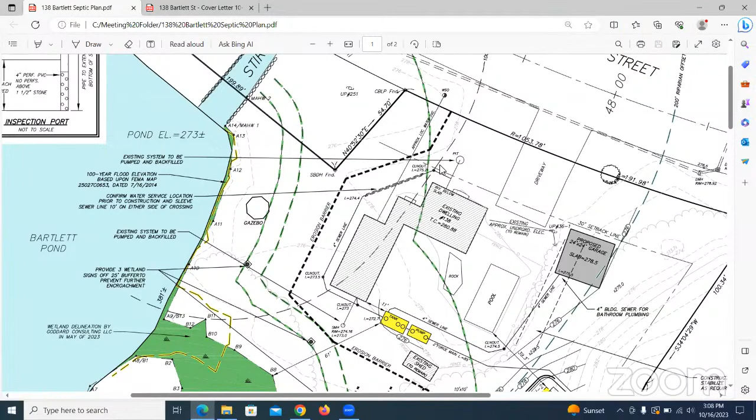I'll switch over to the plan now. So essentially what we have is this Bartlett Pond. This is that existing house right here you're looking at. And out in front of the house, they have a cesspool. And then out to the back of the house, they also have a second cesspool. This cesspool in the back is well into groundwater. We had groundwater at about 12 inches, 18 inches in the backyard. And that cesspool is down right into the groundwater, which is why it failed. The front one, I think, might have passed, but if you have a failure in one, it all fails.

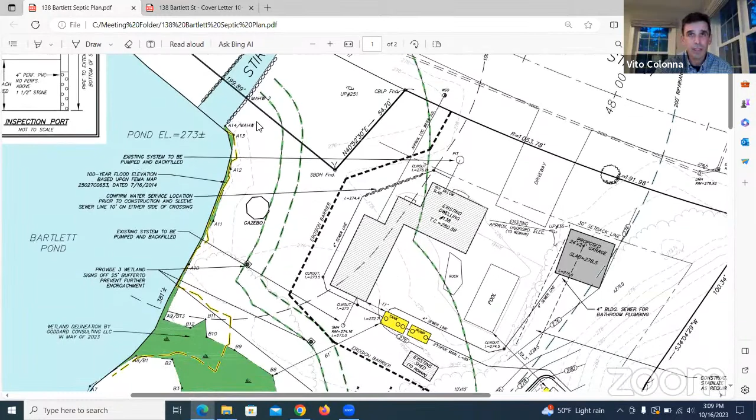So we have Bartlett Pond here with a little fringe of wetlands that pokes up into the backyard. And then we also have the beginning of Stirrup Brook as the outlet. It's that sluiceway that kind of goes down off of the pond and goes through a stone culvert under Bartlett Street. So we have riverfront area that extends out covering most of the site, and then also a 100-foot buffer.

So the 100-foot buffer kind of cuts through the middle, and then the 200-foot riverfront arches out over most of the site. So what we're able to do is locate the septic system outside both the 100-foot buffer and 200-foot riverfront area with the leach field. That's over in this kind of corner over in here.

We had good soils over there, but very high groundwater. We were hoping it would dry out this year, but it didn't. So they're probably going to have to de-water that during construction, just to get down far enough to remove all the unsuitables and bring in good soils. So that's one of the issues with this.

While it's outside the buffer zones, construction-wise it does get into some impact inside that 100-foot buffer, just because of the dewatering required. So what we proposed during construction was essentially to pump it out and through a hay bale corral. So it's just a ring of hay bales to allow settling, and then a series of straw bale check dams through this area, just to give it a chance to filter out and discharge onto a stabilized surface.

And they just need to do that while they're doing the excavation for the leach field, which would only be a couple days. So it would be a fairly quick process, but it is something that they do need to do to get that in.

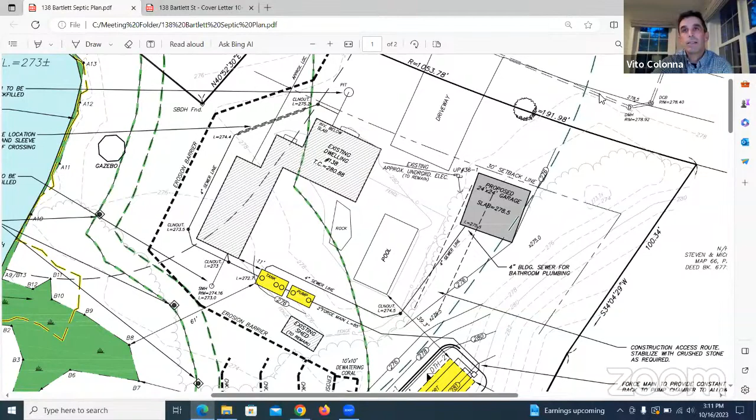And the second component is they were also proposing a detached garage right up in this location. It's a 24 by 24 foot garage, and it is in the riverfront area. This bluish line here is the riverfront. So it's fairly far removed from the resource area, but it still is within that 200-foot zone. It's about 174 feet right now, but it is separated from the resource by the driveway and the lawn and the house areas.

We did look at alternatives. It's one of the things Vinny asked us to do, to look at alternative locations if we could push that further, because there is this space over in here that would be outside the 200-foot, but it comes with its drawbacks. Let me just bring that up. So this is an alternative plan that we developed, just showing that you could push that back.

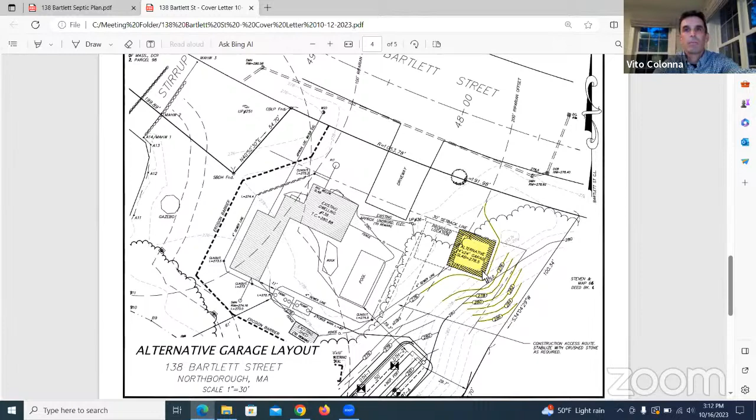The only drawback is that it would get into this steep slope a little bit and would force us to do grading right up to the property line and then clear all these trees up in here. And while that tree clearing isn't in the buffer or the riverfront, it is still native and natural vegetation that we would have to clear just to get this garage a little bit further away.

And there's also a natural flow path that anything that doesn't get caught in this catch basin flows down. There's a low point here and it naturally flows through the site. Putting it here would block off that natural flow path and would force it around and through the back, not creating a very good drainage situation there.

And the third thing is this area here will already be cleared because that's the access path to get to the septic location. So we figured if we're already clearing it, and it would minimize other disturbances and other earth grading, it would make sense to put it right here. And it's in close proximity to the driveway, just for functionality with the site use.

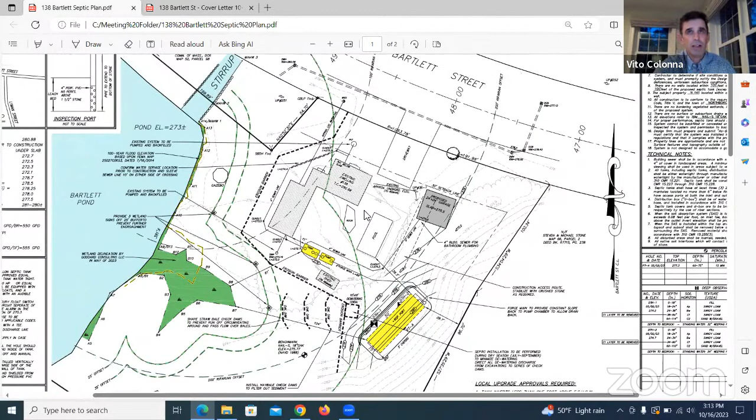So those were really the two items that we looked at under this NOI. So I'll just hand it back and take comments, questions. Thanks, Vito. A couple questions I have here. So for the backyard piece of it, the pump station and the tank, they're like 60 feet away from the wetland line. Mhm. Okay.

What about that cesspool that's in back? What's the plan for that? To crush it and get rid of it, or? Yeah, they just crush it and backfill it. So they'll pump it out first. Yep. So they usually just pump it, then crush it all in and backfill it down.

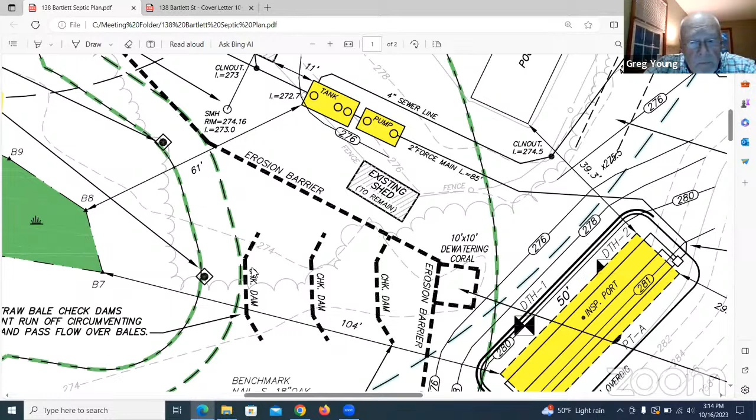Okay. So for the backyard, the only issue we have then in terms of the jurisdiction is the temporary check dams going through there. Yep. And those would just be straw bales, made in a U shape, just to slow everything down. And the front side, the new garage, it's 174 feet away from the riverfront. So a lot of riparian zone. Okay, I'm good.

Any other questions, comments, Commission? No? Vinny, how are you with this? I think it's a good design. It's a tough situation. Just so the commission knows, there's a cesspool that's in the front. They're going to be running a pipe all the way around the house. So if people drive by and see work on that side of the house, they're probably out there putting that new line in around the side to connect into the septic tank in the back.

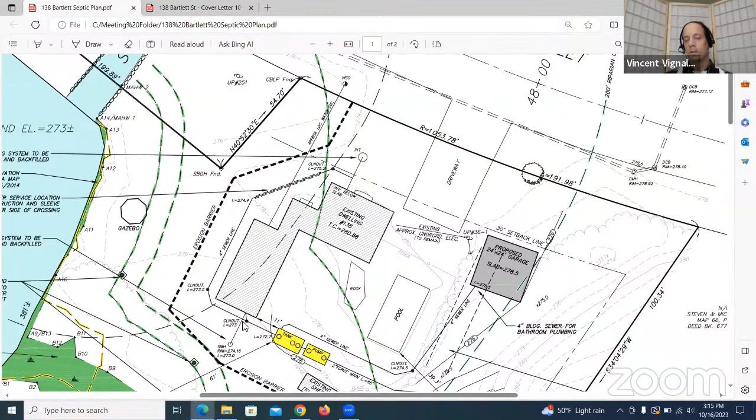And the same situation is occurring. It says garage, but I assume there's going to be some kind of a use in there that requires a sink and water because you got a 4-inch sewer line coming from the garage. Is that the case? Yeah, I forgot to mention that. They would have plumbing in this garage and they would need the sewer line that would come down and connect into the tank.

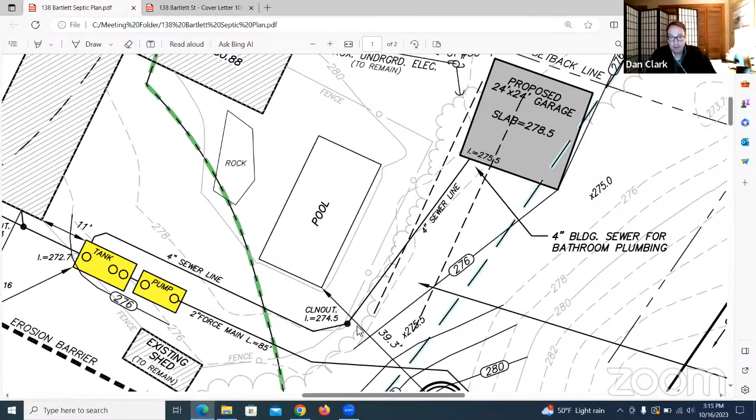So hang on a sec. I guess I do have a question. So the front one is staying online? They'd abandon that one too. So essentially what they'd end up doing is cutting into this pipe. There's an existing line coming from the house out to the pit. So they'd cut that line and route it around to the back. And the same thing, they'd pump that one, collapse it in and compact it with fill, and get rid of that one in the front too.

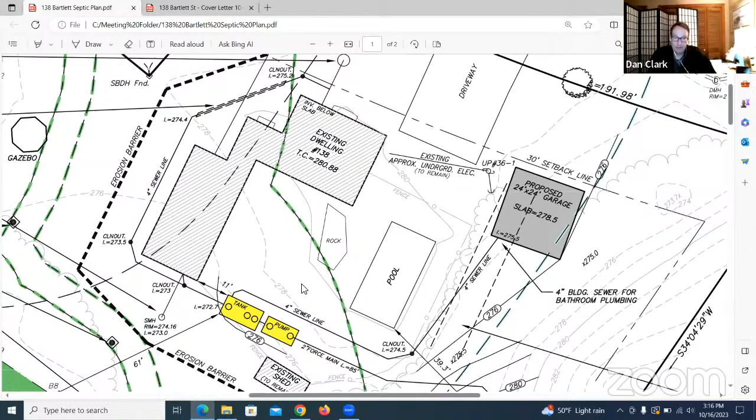Oh, I see. The sewer line from the house goes out the front and around the back. Yeah, there's two. So the proposed will link them all together into one. Right, now I see. They have two cesspools, one on the front, one on the back. So we're trying to link them all into one common system. Got it. You good, Dan?

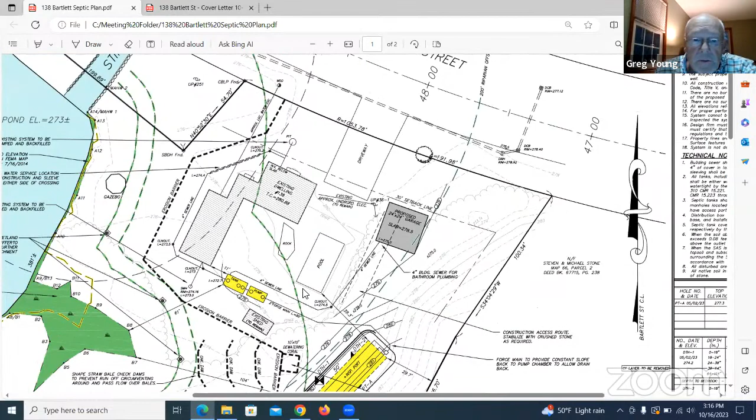Yep. Okay. Let me see if we have any public questions or comments here. I got a hand up, Ann Beckstrom. Ann, I'm going to bring you into the meeting as a panelist. Any minute now, we should be having activity. Looks like she's on mute. Yes, Ann, you're muted. There you go. Okay, sorry about that. No, it's fine. I did the opposite of what I thought I was doing. Excuse me, Ann, before you start, could you identify yourself?

Oh, sorry. Ann Beckstrom, and I live at 152 Bartlett Street, which abuts 138. So I just had a question regarding that other yellow section that is shown on the map, not those, but the other one there. Yeah, right there. Vito, you want to answer that one? That's the leaching area, the leach field for the septic system. Is that existing? Nope, that would be proposed. So they're going to replace the cesspools here with a new leach field out here.

And does that go into that berm area? Are you having to dig into the berm area? Yeah, so it kind of just abuts up to that berm. So it would be more of a filled system. So the berm would come down and then bump out over the leach field. So it's up against the side of that berm, but it's not something we have to dig into. We're not cutting away. We're actually going to fill right there.

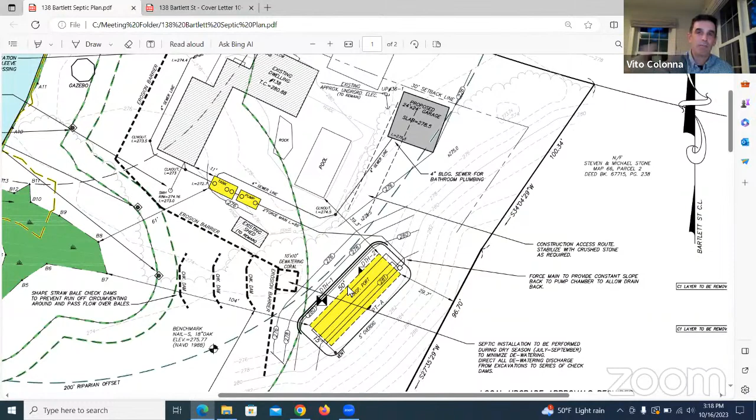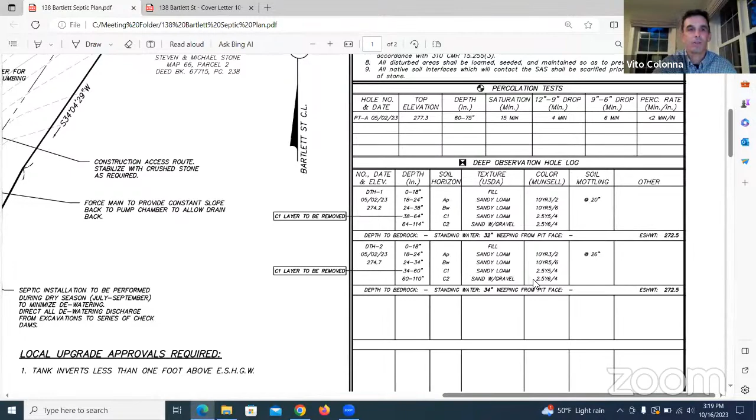Okay. And the groundwater there is? It's pretty high. I have the test pits on here somewhere. Yeah, 20 inches, 26 inches, the groundwater in those two in the leach field. Okay. So it's fairly shallow right there.

So are there any negative impacts of putting a leach field in an area that has such? Not necessarily, just because we would have to fill it up. So the leach field has to be at least 4 feet or 5 feet above groundwater. In this case, we have really good soil, so it has to be actually 5 feet above water. So we're going to bring in fill to bring that system up. I see. Okay. All right. Thank you. That answer your question?

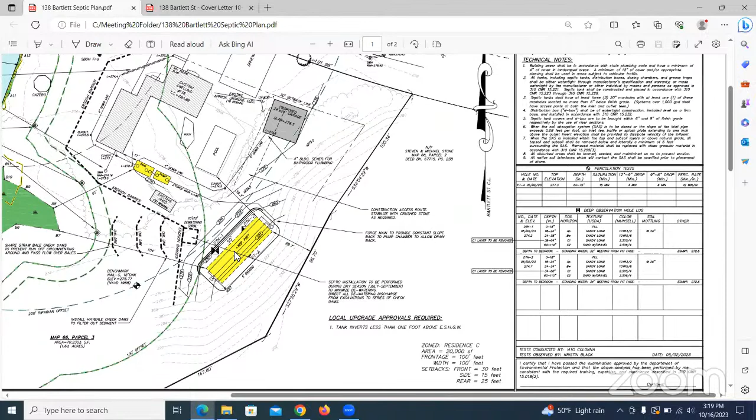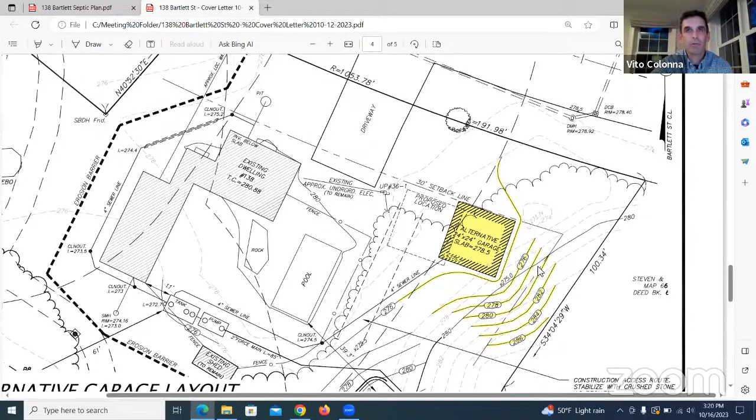Yeah, I think so. And when we are talking about the garage, we're talking about the positioning of it closer to the driveway rather than further away from the driveway, which would be then closer to our property. Just wondering how close that actually is. How close it is to the property line? Yeah. This option is not the preferred option. So this is about 25 to 30 feet. I don't have an exact dimension on that. And then this one would put it about 50 feet away.

So if we look at the street view, proposed wants to be right here. And then that other option would put it back into this hill, in the back. And you'd have to take all those trees down, which wouldn't be the greatest. So, okay. Hopefully everyone's okay with your preferred plan. Okay. Thank you.

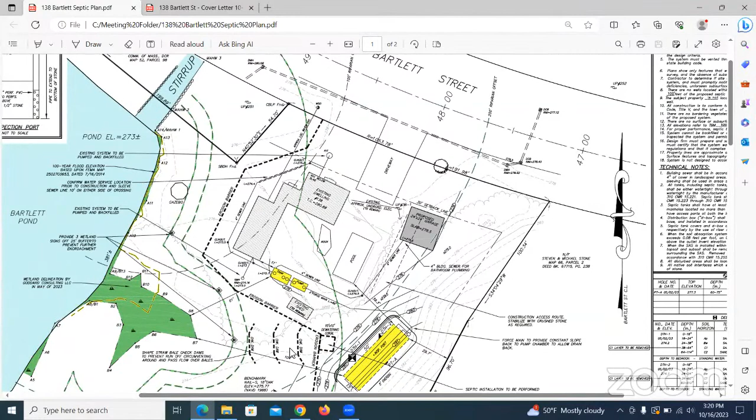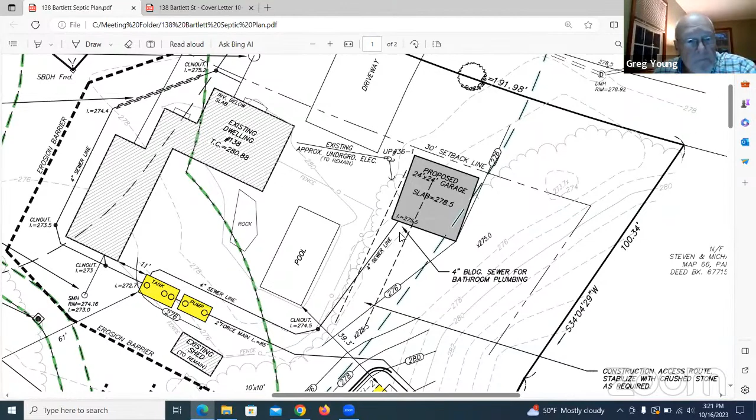Okay, Vito, what's going to be the deciding factor between proposed and alternative for the garage? Well, we like this one. This was the proposed plan. We just did the alternative. Vinny asked for alternative analysis, which you have to do anytime you do work in the riverfront area. It will justify the location that is the best, and it sounds like the commission agrees that what they're proposing is the best.

It's not really deep into the 200-foot zone, and there's a lot more alteration on the alternative, even though it's outside of the buffer zone. It's altered riverfront area right now. So okay, great. I think what they're proposing is the best opportunity here. Okay. I don't see any more hands up. Peter, just a quick question.

I thought about that garage at the back end of the driveway, closer to the house. Does it have garage doors on it? I'm just wondering if at some point somebody's going to come for an extension off the driveway to get into the garage if we don't place it there now. Yeah, we asked him that because it made sense just to come straight in. And he didn't want it there. I think this is going to be more like a storage barn.

He was unsure if he was actually going to build it, but he wanted to ask for it while he went through the process anyway. So the septic's really the key item he needs. He looked at it here and thought it might be too close to the pool and maybe not work with the house, and it would be nice to have it off to the side a little bit. I think it's more of a storage barn, shed, garage. I don't think it's to pull the cars in every day.

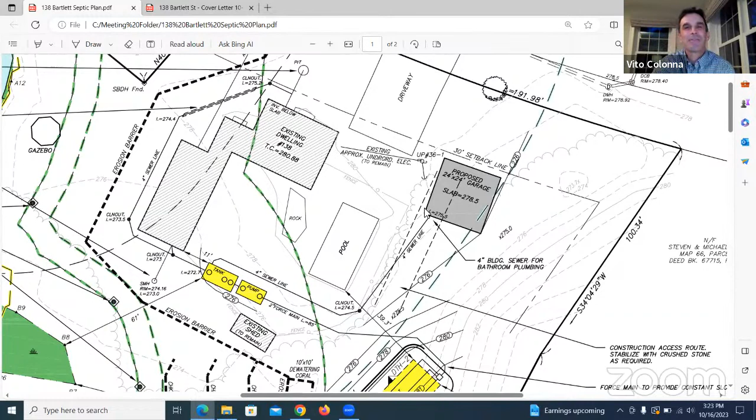Okay. Any more comments, questions? All right, then we can move ahead. We need a motion to close the hearing. Vinny, before we move ahead, any last comments from you? No, I think this is good. I think we're ready to go. That was a question I had in my mind that I asked Vito about, the garage being there with the big utility pole and a guy wire right in front of it. They said that's what they want, and we'll see what happens in the future.

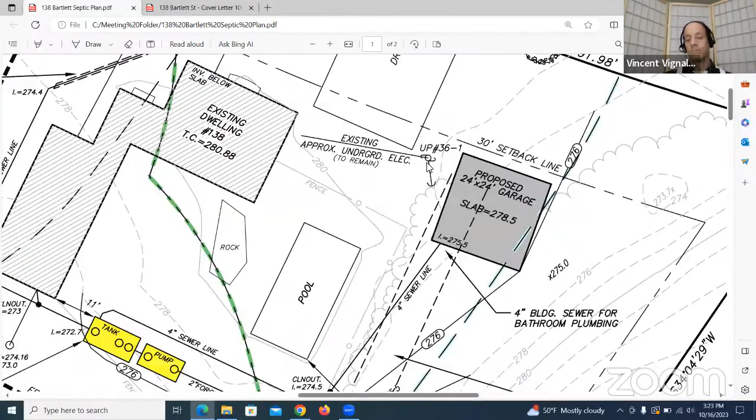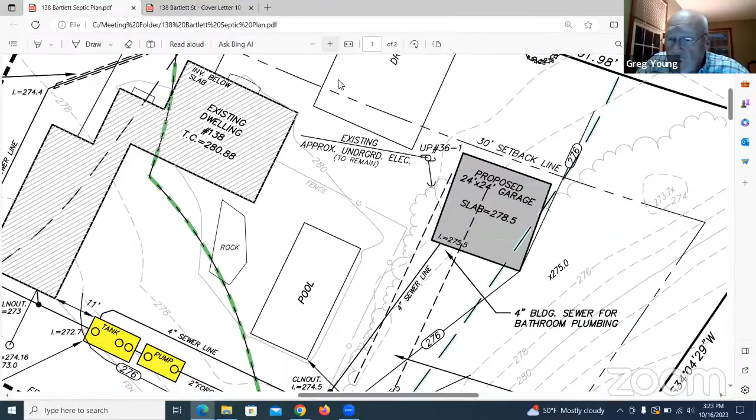Move to close the hearing. Is there a second? Second by Diane. Roll call. Dan Clark, yes. Justin Dufresne, yes. Diane Goldner, yes. Todd Helwig, yes, and I vote yes. Now we need a motion for 138 Bartlett Street. I'd move to issue an order of conditions for 138 Bartlett Street.

Oh, actually, the only thing we had on this one is your detail. I think your detail didn't have the fabric on the silt fence buried 6 inches. So I was going to do that. Okay. It's either this project or the other one. I forget which one. It might be the other project. I think it's the other one, though.

Okay. Yeah. Yep. Second. Seconded by Justin. Roll call. Dan Clark, yes. Justin Dufresne, yes. Diane Goldner, yes. Todd Helwig, yes. And I vote yes.

And just to note that one, Dan is not allowed to vote on it, though. Oh, he did. Okay, well, we remove that vote. So we just take that back on the minutes. Take it back. Rescind the vote. Still had the majority, but just so the clerk knows to not add that in. We don't need an appeal on that minor thing.

Where's my gavel? I don't see a gavel.

Okay. No special conditions you can think of, Vinny, on this? No, it's all our standard conditions. Do you believe we actually had signs added to the plan on one of the drafts? So we didn't note those, but I think there were 2 or 3 signs to keep them from encroaching farther into the buffer area at the current edge of the trees. Correct. Right. Okay.

When you start the work, the DEP sign, make sure it's visible where you're having it, it's gonna be in a visible location, not tucked around the side of a tree. You got a lot of traffic back there. Okay. All right, good. Very good. Thank you. All right. Thank you.

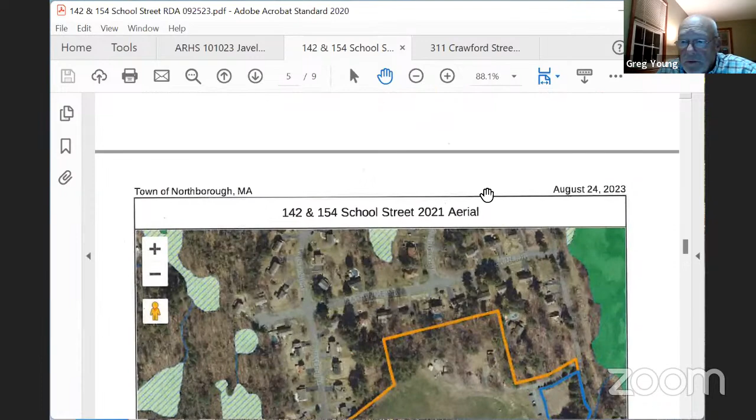I think there's another photo before this. It's a little harder to see where things are, but it's the same image. That's Joseph on there, and Catherine is here. So Joseph and Catherine. The actual wetland line is this red line that runs along. It's a steep slope, so it's pretty obvious for a wetland edge, and it comes around like that. It's maybe 5 feet beyond their limit of alterations, so they're not in any wetlands for this. Okay. Questions, comments?

None? Let me see if any abutters have questions, or any public attendees. I don't see any hands up. Going once, going twice. Okay. That's it. So we are going to close the hearing, number one, and then vote on the RDA. So we need a motion to close the hearing. If there's no other comments from the commission, we need a motion to close the hearing.

I move that we close the hearing. Second. For what, Diane? Good question. Because it looks finished the way it is. 142, 154 School Street. Okay, yes. Is there a second for that? Second. Okay. Roll call, Dan Clark, yes. Justin Dufresne, yes. Diane Goldner, yes, Todd Helwig, yes, and I vote yes. Hearing is closed. So I believe we are looking for a negative determination.

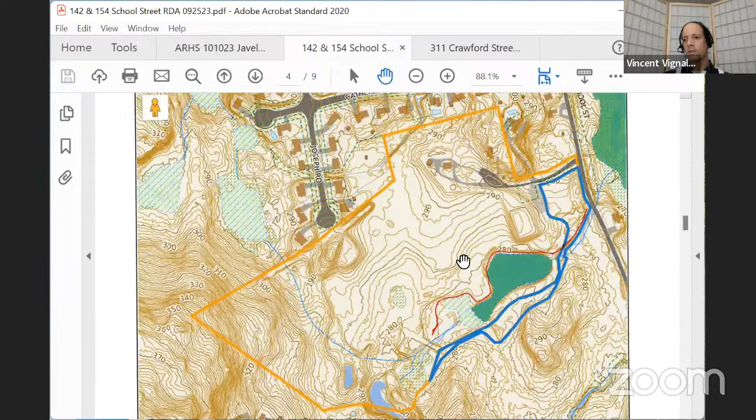That is correct. No special conditions, Vinny? No, nothing I can think of. It's a determination, so we don't really get too many conditions, but I will be out monitoring and making sure that the limb and the branch pile gets removed or chipped up, taken out of there. And if anyone goes out there and is golfing, give me a call if there's any issues and I can go out there. They've been very cooperative.

Good. Okay, so we are going to vote on issuing a negative determination for 142, 154 School Street. So moved. Is there a second? Second. Seconded by Todd. Roll call. Dan Clark, yes. Justin Dufresne, yes. Diane Goldner, yes, Todd Helwig, yes, and I vote yes. Dudley, we're all set. Thank you. Okay, thank you. All right.

86 Ridge Road, NOI. We have no DEP number for this one yet, Vinny? No, I have not gotten a DEP number. We really can't close the hearing. Is Vito back? Yep, I'm back. Okay, one thing, Vinny, I don't know if you have a copy of this plan. I can't find it on my laptop at home. But yeah, we don't have a DEP file number on this, so I figured we wouldn't be able to close tonight. But we could still go through it. I have it. Okay, pulling it up, perfect. Thank you.

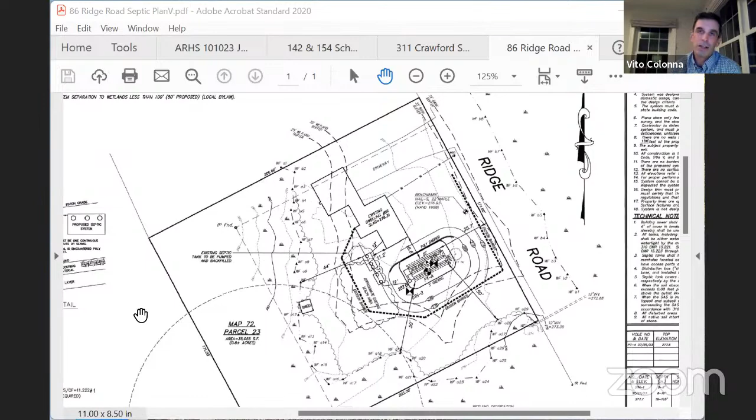And we ended up using an Eljen system, which is an alternative system to provide a little enhanced treatment. And the benefit to us is that it shrinks the leach field size by 40%. So it's kind of a win-win. We get the further separations, a little extra treatment, but also save that size on the system itself.

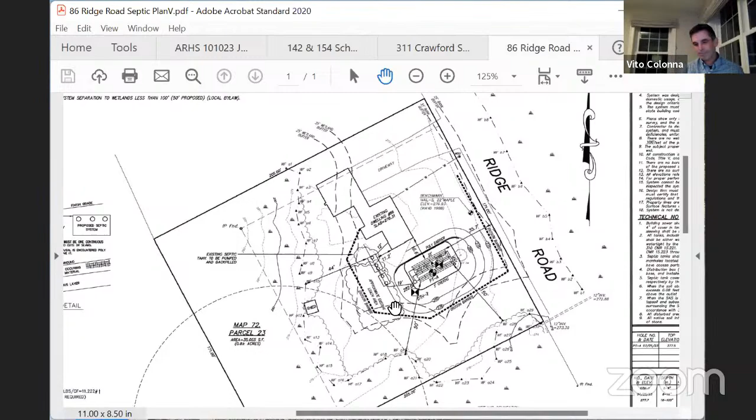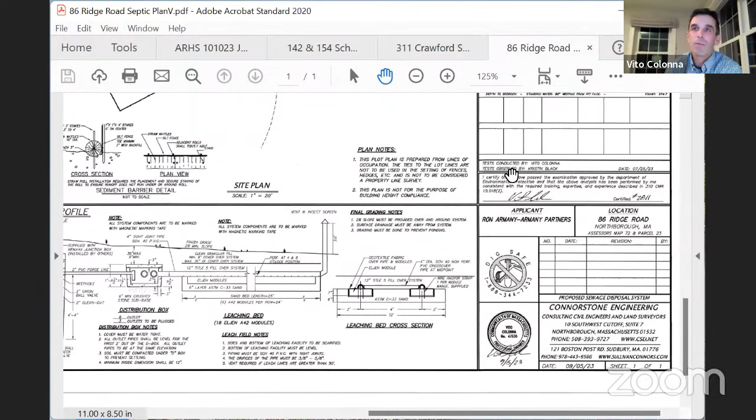Vito, what's the name of that system again? It's called an Eljen. Yep. It's a prefabricated, it's kind of a mesh plastic wrapped in filter fabric. Yeah, I think on the bottom right side of the sheet should have a little cross section. They're almost like bricks. They come in 3 foot wide, 4 feet long, 1 foot thick. And you just kind of place them in and you put the pipe over the top of them. It just gives more area for the media, for the microbes to grow and break everything down.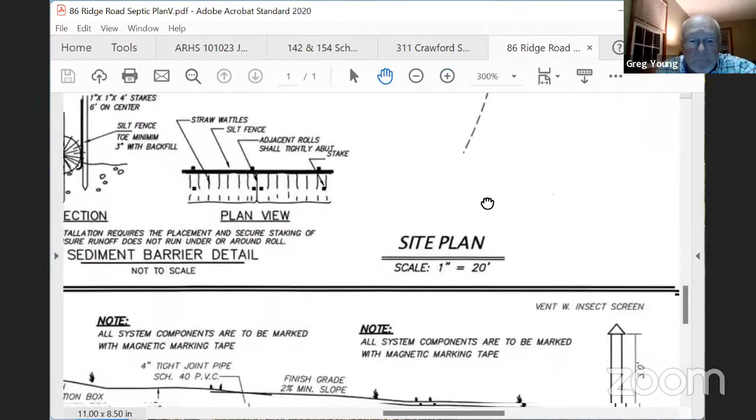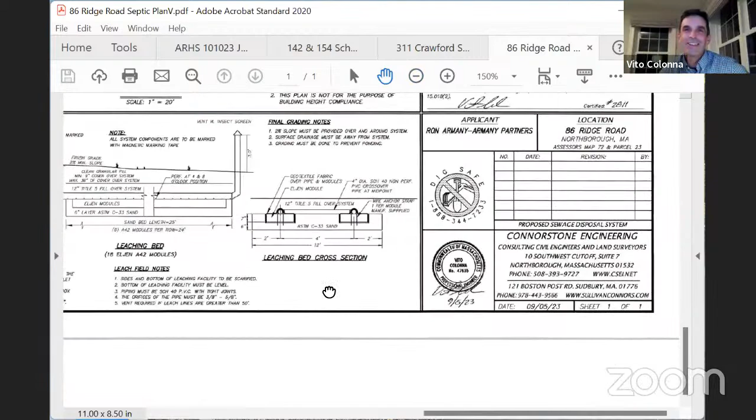Yeah, so it's just an alternative system. It's all approved through DEP for those uses. Yep. I think that's all we have on that. Unfortunately, we don't have the DEP number. That's the only thing we're missing. You didn't have many options where you could go. No, we didn't really. So we kind of just picked right in the center of all the wetland buffer zones. Have you been in front of the Board of Health?

Not yet. I know we need relief from them on those. I talked to Kristen when we were out on site, and she agreed there was really nothing else we could do. So I don't see it really changing through Board of Health, but we do have to go through that. We haven't gotten approval through them yet. Okay, any questions, comments from the commission? Okay, then we'll see you again next month, I guess, Vito.

Yep. I'm sorry. And the local bylaw, just to add in, our local bylaw requires a 100-foot setback, but that's for new construction. It allows a reduction to 50 feet for a leaching area in a repair. Yeah. Sorry to interrupt. Okay, no, I don't see any public hands up. All right, so we will see you. Well, we need a vote to continue, I guess, Vinnie, right?

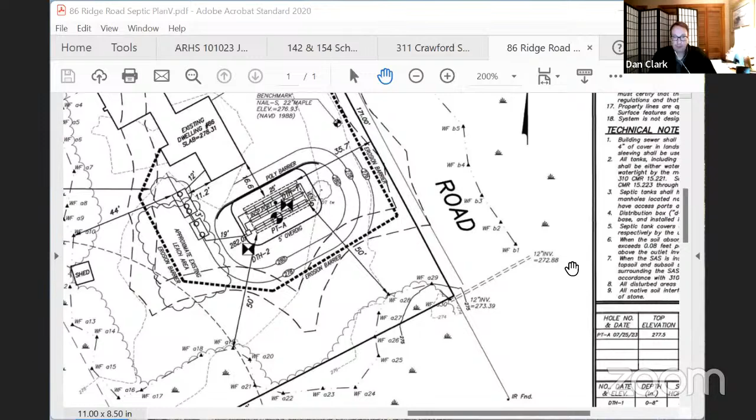Yes, motion to continue 86 Ridge Road. Second. Seconded by Diane. Dan Clark, yes. Justin Dufresne, yes. Diane Goldner, yes. Todd Helwig, yep. And I vote yes. All right. Well, thank you. I'll see you next meeting. Thanks, Vito. Thank you, Vito. Okay.

That is the majority of the items. We have some updates here, right, Vinnie? COC request, Dennis Circle. Yes, 26 Dennis Circle. All right, let me pull that up. This was one from 2004, I think, and the request at the time was to install a utility electrical line. This is the driveway coming up to 26 Dennis. There's a stream. Downstream is going this way. Upstream is there. Nice little frog wet area there, and here with the stone lining.

This is a discharge from Dennis Circle coming in and discharging to the wetland here. What was proposed was a power line coming right up the side of the driveway. It was put in 15 years ago, and it's still being maintained, still working, and everything looks good. They're selling the house, so that's why they requested the COC. It was found by the attorneys during the sale. Is that a culvert underneath the driveway? Yep, there's a culvert under the driveway. Okay. You're good.

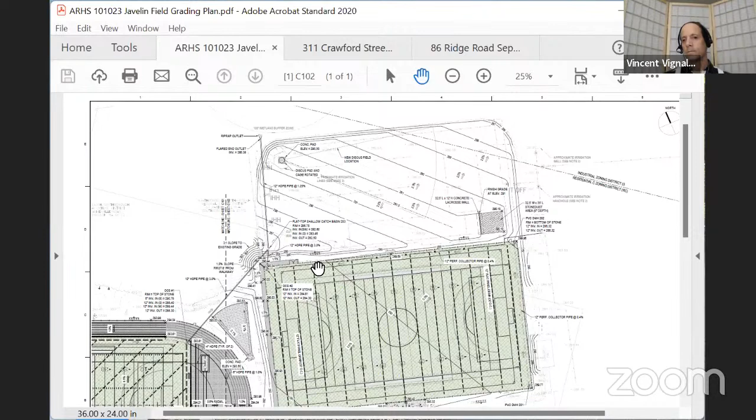Well, number one, we need the current plan updated to reflect what is. And number two, we need to have a discussion with the contractor that they don't make any more significant changes without speaking to you first. Yep, that sounds good. I mean, that's not rocket science. That's pretty common, I guess. But yeah, I was expecting someone to be here and make that actual request in person, but they're not here.

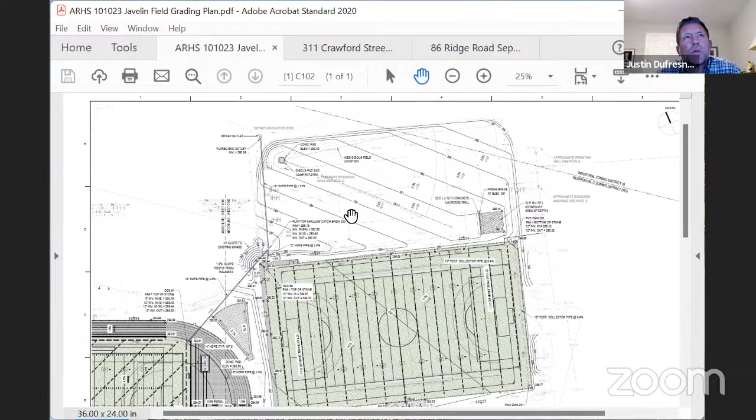In this area, Vinny, just for my benefit too, it was a field before, right? It's not like they cleared woods or anything to put this fill here, right? So was it lawn before and it's just kind of staying lawn? They've just kind of raised it up with the fill and graded it out? It wasn't a wooded area, right?

That's correct. What you can kind of see now that I've zoomed in a bit, you can see the old fence line here, and the new fence line is back here. So they moved it back a little bit, just matching the grades with a good slope off the end. And then they now have a center line going diagonally across and sloping down on both sides. It's like 288 and 290. So it's probably a 2-foot fill in much of the area, 288, 290, 290 and a half or so. So they just had more fill, and they're just resurfacing and grading the whole site.

Was this field set to get redone as part of the original one, and they've just brought it up, or were they not even going to touch this field before? This was not going to be altered as far as I remember. All the work was going to be on these other areas down here on the practice field and the stadium field. And this is the discus area, I think is what it's called.

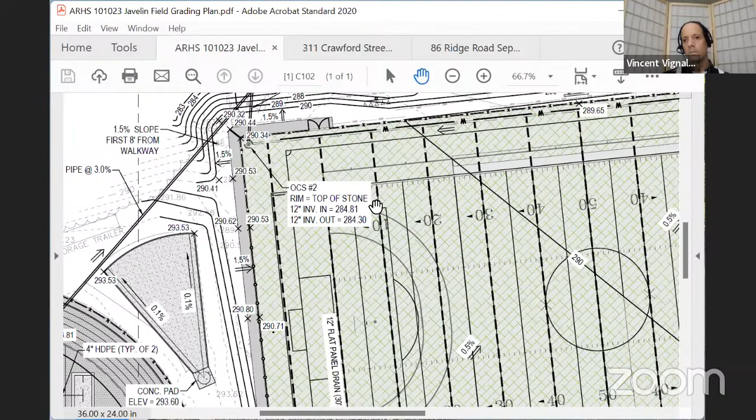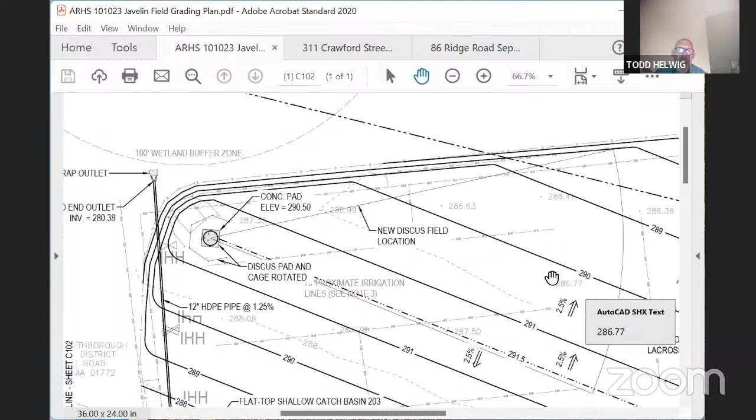So they've expanded their area of alteration. But again, I'm not sure. It's a town project. They decided it would save money to not haul the material off, and they just used it on site. But this isn't a wetlands issue. This is just land disturbance. Correct. Yeah, so that's not why. They're not disturbing anything more, they're just changing the nature of the disturbance somewhat.

Well, they're disturbing more because they weren't proposing to alter this field area. Oh, okay. So it is more disturbance, but it would probably have gotten permitted if they asked for it. It wouldn't have made a big difference because they have put in the perimeter sediment controls, and they hydroseeded this area. Actually, when Greg and I were out there last Wednesday, they were hydroseeding it. So I think it's stable. It's just the fact that it's a change of plans.

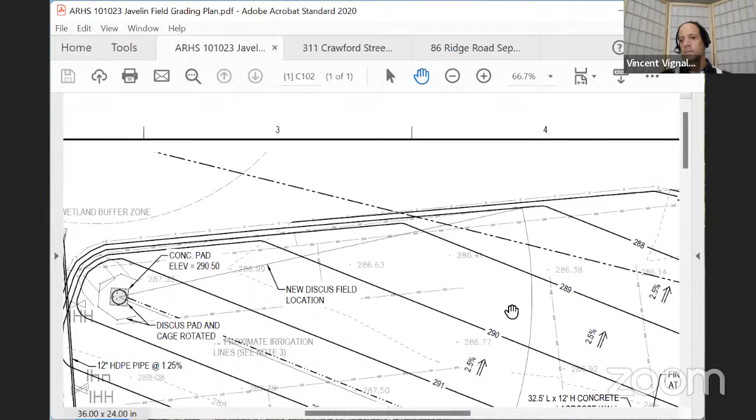Yeah, to me, it doesn't dramatically change. If they were clearing trees and things like that, but since it was grass and lawn before, and now they're turf fields, they had all this topsoil that they had to get rid of, so they probably saw it as an opportunity to just redo this area. So I'd agree that if it was part of the original, I'm sure we would have just approved it and it would have been fine.

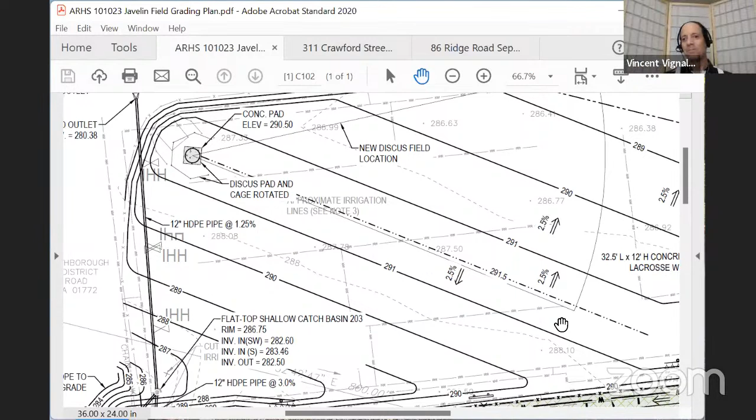I would just echo Greg's sentiment to let them know that changes like this certainly need to come before us. Hopefully where they are in the project, there won't be too many more. They're trying to close up. Yeah, I don't expect any more. Would you want them to come to the next meeting? Speaking for me personally, I'm okay with this as it is, and I'm in favor of letting it go. You can certainly tell them not to do this again, but I don't think they need to come back. We'll just keep an eye on it when we drive by there.

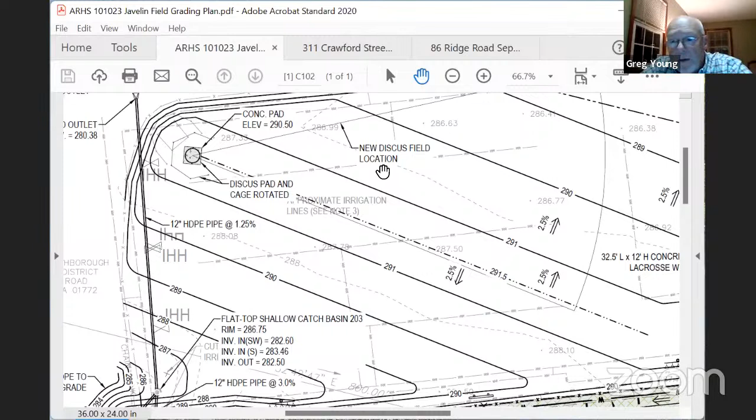Okay. And we'll ask for a formal plan. Actually, this would probably be their formal plan. Okay. There was somebody named Craig Robert here that dropped off. Say that again? There was a person named Craig Robert. He was for 142, 150. Okay, that's the golf training center. He was an abutter there. Yeah, he dropped off.

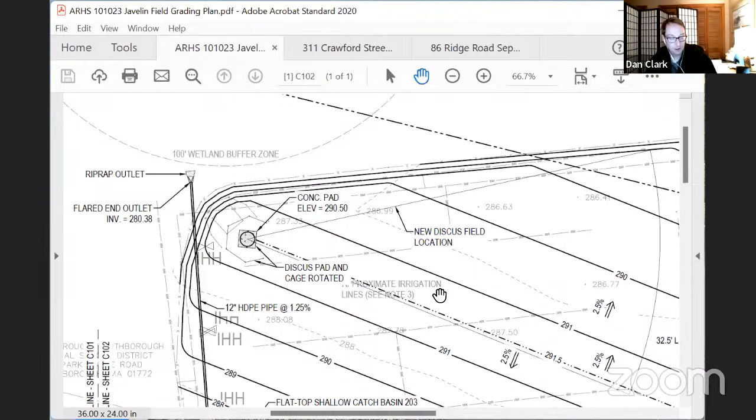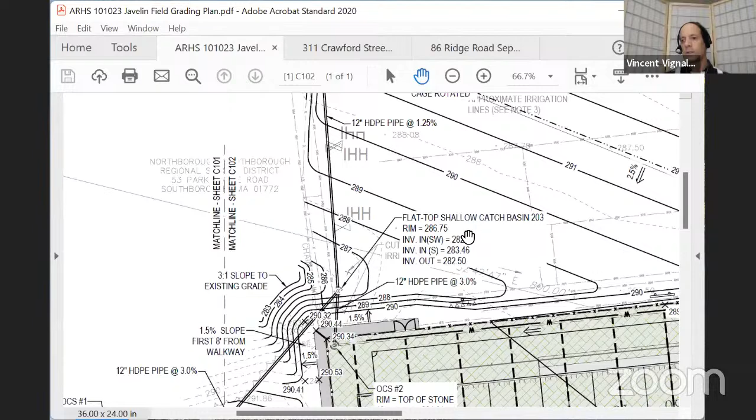But Vinny, aren't you still concerned about the outlet overflowing into the wetland? Yes, I am. So how do we get them to address that? I think I make a deal and say, the commission was okay with you making a change in the plans, but we need to see some protection of that outlet, and it needs to be stabilized appropriately. And if it's not, then you'd have to go back to the commission at the next meeting. So that might be an option.

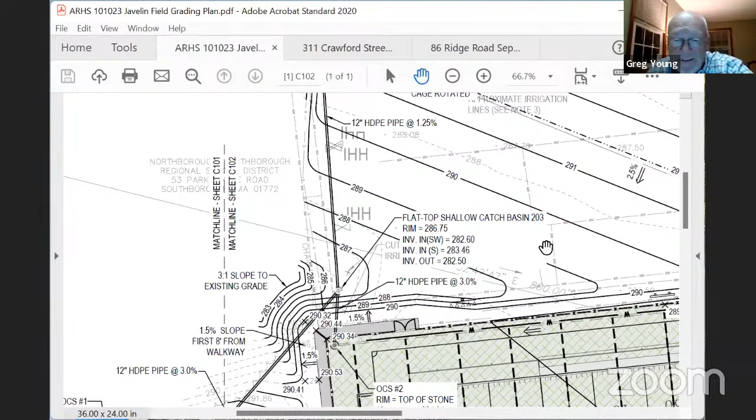Oh, Vinny, Greg Martineau is here. Excellent. Hey, Greg, want to bring you in as a panelist? Any minute now. Okay, Greg, you're muted. Can you hear me? Yes, we can hear you. So I apologize, I did not receive an invite to the meeting. I'll bring you in as a panelist. Sure.

All right, let me know if you can hear me. I hear you, yes, very good. Okay. So thank you. And I apologize for not joining the meeting earlier. I didn't realize that I received an invite to the meeting. I actually looked at the agenda this morning and noticed that under the violators, Algonquin Regional High School was listed. So I definitely was watching.

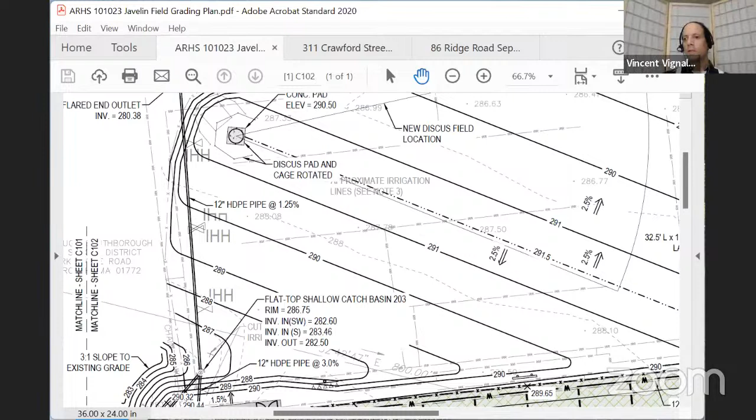All right. Let me know if you can hear me. Yeah. Very good. Okay. So thank you. And... Lost him. Go on. We were going to do what he wanted anyway. We'll give him a chance to come back here.

So Vinny, you talked to the contractor about the basin, which wants something more robust. Yeah, I have to go out there and look at it. It may have already been done. The contractors on this site have done a really good job, but I have not had time to get out there. We were moving right along in the meeting, and I was addressing a lot of that other stuff, and I didn't get out to this site. Yeah.

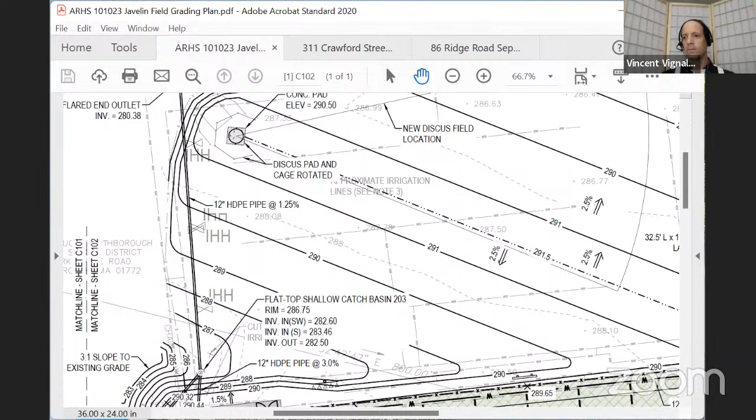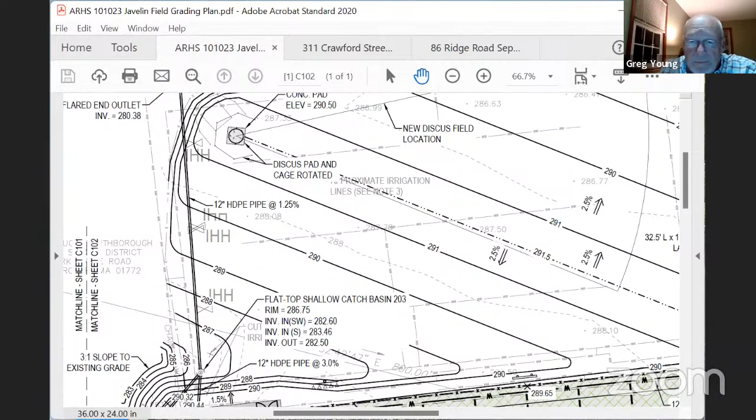I don't see Greg rejoining yet. Well, let's move on, and we will deal with him when he comes back. It should be a short discussion, so. Right. Oh, he's back with a hand up. Here we go. Had a lot of Zoom fun tonight, haven't we? Fun with Zoom. Yeah. Hey, Greg, can you hear us? Yes, and can you hear me? Hopefully not twice. Yes. We can see you too. Okay, welcome. Good. I apologize.

So just some context. In terms of the javelin field, in the original plan that we submitted, that was a grass field, and we were going to use it for javelin and discus. Part of the project was doing some baseline testing for PFAS. The soil conditions came back where we were required to report to the DEP, hire a licensed LSP, and determine what action to take. We had many meetings with the LSP and the DEP, and basically the DEP recommended two options: keep the contaminated PFAS soil on the construction site, or dispose of it as hazardous material. We did some cost estimates, and that was a little under $3 million.

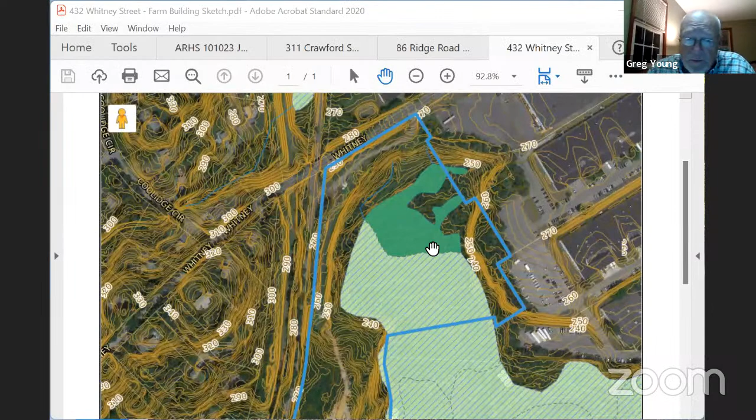He wants to build, is it a feed shed or something, Vinny? A farm building. It could be for feed, it could be for equipment. I'm trying to pull up the screen now. Well, before it was a house. Yes, it was his house, with a barn, wasn't it? There were two pieces. Maybe I remember there was a house. It was way back. Yeah, but it was bigger than what this seems to be.

Well, the situation here is we've got Whitney Street right up along the top. You can see that. And then the railroad track comes down here, and on the west side of the railroad track is the aqueduct. And this property, you guys are very familiar with this, I hear. And this is the wetland in green. The contours are in here, and the access comes in right through here, and it comes down and goes right by this pinch point there. And then it goes back up the hill to the top of the hill, where he wants to

put the building. He's requested and actually he's been issued a building permit to put a farm building here. And it's almost 200 feet away from the wetland, so it's beyond wetland jurisdiction, and so he was issued the building permit for that. The access road is where I had a question. It's an existing farm pathway. It's not something that's going to be passable by a concrete truck to do the work for a building up there. So there needs to be some review from the commission of any improvements to this road.

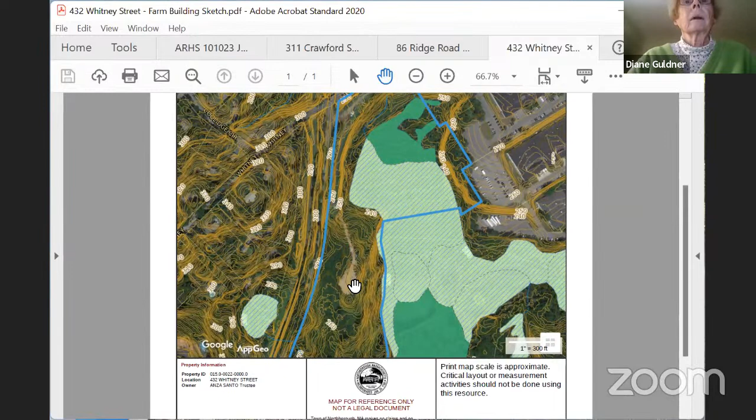Well, that's the size of my piece of property here, and pretty much what everybody else has over there. Whitney, Coolidge, all that. Yes, well, you can see some of these lots here. So that's probably the acre size in some of these lots. That same general size would be an acre, acre and a half. But he has the area to build the building. It's the access that is the issue.

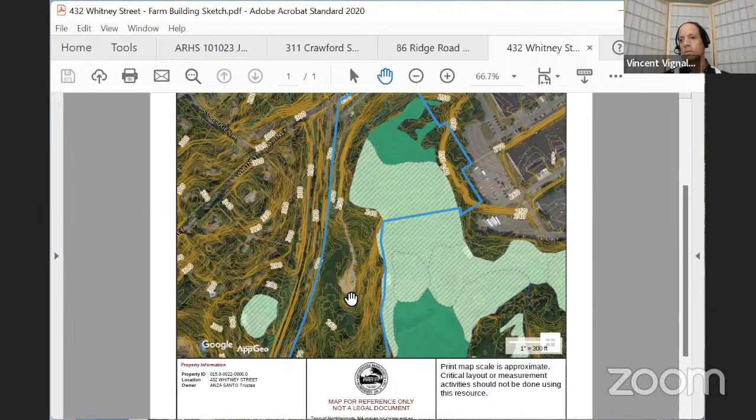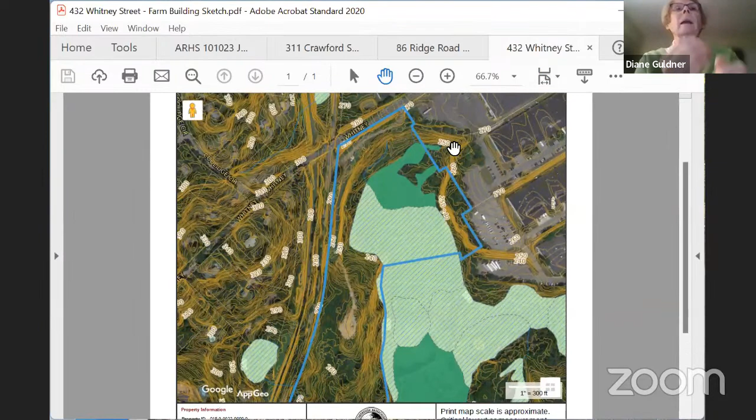I see what you're saying about the access, but what do you envision the access should look like? Well, Diane, I think that you walked the property before, right? Yep. Okay. I believe most of the filling that he did was what is going to be the access road. He did a lot of filling with various materials alongside that piece there by the pinch point and in front of it and behind it. And that is why the cease and desist was issued, so that no more work would be done inside the buffer zones. That was the original reason for the C&D.

Is that still in effect? Yes, it's still in effect. It says he can't continue to do any filling or alteration of that area. I need to figure out where that area is, because the cease and desist is particular. Let me pull that one up too.

So how could he improve this cart road with that in effect? Well, this is the cease and desist. Did it come up on your screen too? Yes. So this is the order of cease and desist work, and it was done in May of 2020. And this is what is kind of alleged from observations, but what it actually says is the cart path area work must cease until you receive a negative determination or an order of conditions from the commission. And he's saying that he's going to submit information for that. Oh, I see. Gotcha. Okay.

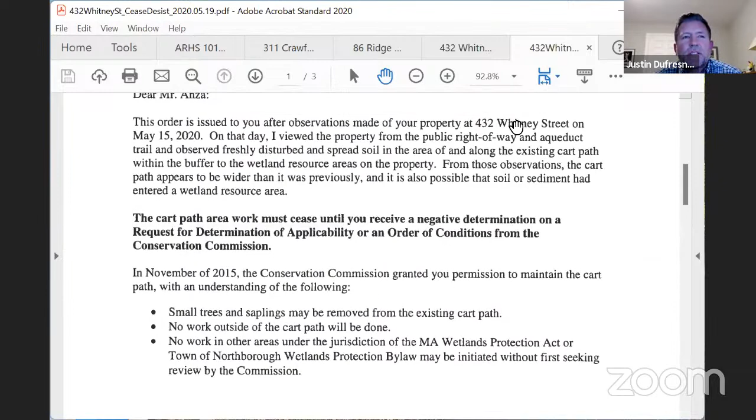I think if I remember back, Vinny, to right around that time, 2015, 2017 timeframe, he had submitted something, right? I'm sure we probably have a record of that, but I remember it was building the road a lot wider, pushing it closer to the wetlands and creating a bigger road. And I actually think it had wetland impacts there. And maybe it was just filed as an RDA or something. And I think at the time we were saying, well, if you're going to impact the wetlands, it needs to be an NOI, it can't just be an RDA. And there's a lot of back and forth.

And I think there's work happening out there at the time while we were doing it. And then everything kind of stopped. From what I know, and just driving by there a lot too, it seemed like after our meeting and after we talked about it, there wasn't a whole lot of work that continued on it. So, right, I think it's dusting off some of that information and seeing where we were at that time. And hopefully if he gets an engineered plan and it has a delineation on it, something that we can actually look at and review and feel comfortable with, then I think we move from there, right? Yes, that's what my hope is.

And I'm counting on you folks for the memories, because the file is probably a 2 foot, 3 foot deep file of information. And I went through it. I found an old 2012 notice of intent that was denied for doing some work similar to this. And then I saw some activity in 2016, but there was no formal application there. And then in 2019 and 2020 was when the filling occurred. And I was under the impression that there is an access road that comes down in through here, and it went through what is currently a wetland, because there are 2 culverts in this wetland area. And that was his old access path.

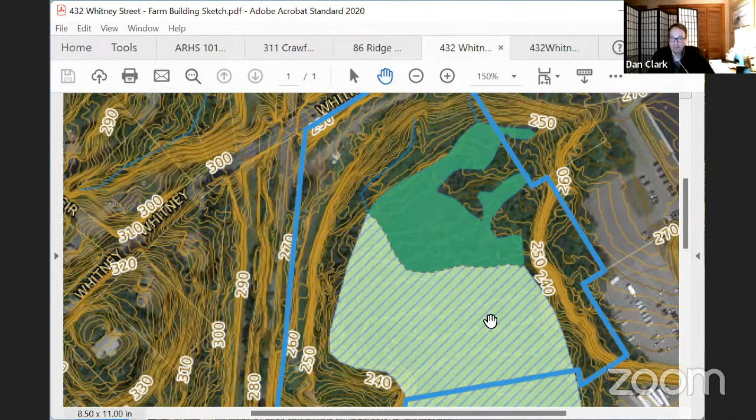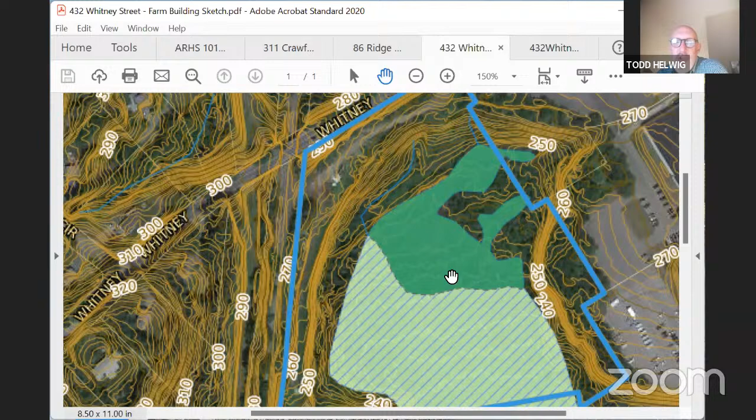You had a question? I don't know that it was a question, as maybe a statement that was going to get me into trouble. I mean, okay. I just can't, all of the pain and expense and wasted effort that this guy has put all of us through, he's not going to get an inch of benefit from me. Understood. Okay.

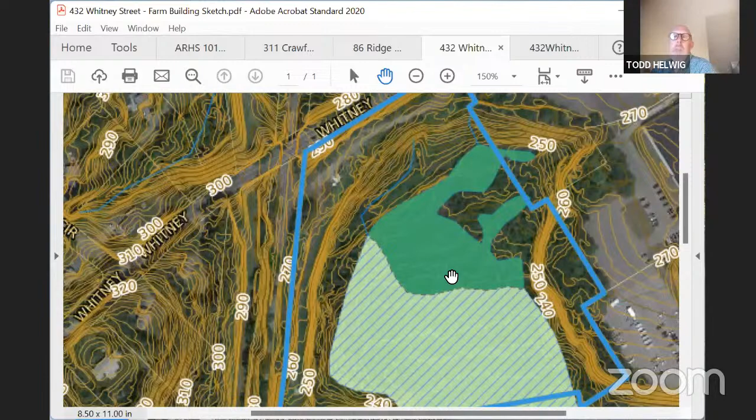Yeah, and I'm just coming in new. That's why I have it on the informal discussion aspect, so I can get the feedback. I talked with Tom. Tom said, be careful, trust but verify. But are any of the other boards doing anything about this? Well, I think Board of Health pretty much engaged across the street. Yes. I was surprised that he could get issued a building permit.

Well, because the building code is a state permit, he meets all the standards and requirements for the building permit. He will still need to file to confirm that he has access. But if he were to get access from the railroad company and drive down that way and access his property, he'd be okay to build his building. Well, he has to be in compliance. He can only get a building permit if he's compliant with all of the town regulations too. Yes, but he is. He's in compliance with the cease and desist because he stopped doing the work. And I didn't find any other rules or regulations that he's in violation of because he's outside our jurisdiction.

Is by any chance the planning board looking at ways they could maybe put a stop to that? Every chance they can, it sounds like. But the trouble is they're exempt under the ag stuff. Okay. They're exempt from zoning under the ag stuff. So there were a lot of questions there, and my supervisor, Laurie, the planning director, has reviewed this, and she said that we really don't want a bad situation out there, but what he's asking for is allowed under the laws.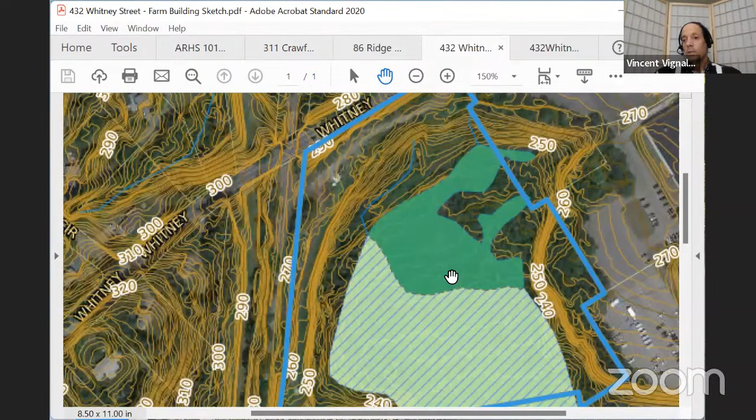Yeah. I actually walked the site a week or two weeks ago with Mr. Anza and walked up to this area. He was pleasant. Well, that's good. All right. Informal discussion. So that's another thing that's on the radar screen. Thanks for your input.

Anything else? Anything we can expect for next month that you know about? We have three continuations here. And the Boundary Street Dog Park. I had a meeting this afternoon with the proponents, Weston and Sampson, and they're going to finalize the plan for submittal, I think next Friday, not this coming Friday, which is the due date for our next meeting.

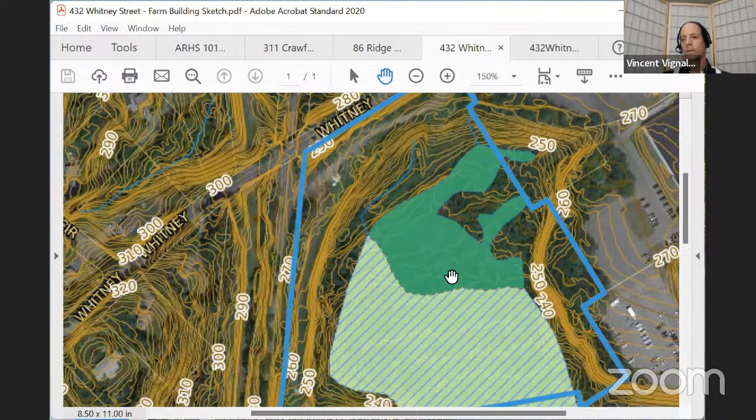Now, Weston and Sampson were the same folks we dealt with at the senior center trail. And there was a lot of dancing and jousting and negotiating in terms of getting a PE stamp on that. Did you get that up front? I have let them know that, yes, and many of the same details are being revised to match the ones that they corrected on the senior project. So I think we're going a step in the right direction. Good. The dog park next month, these three next month, and who knows what else. We'll probably have an update again on all three of the items today: High School, Forestry, and Whitney Street.

All right. Anybody else want to bring up anything that they have seen or have a concern with? How about attendance for next month? Any issues we know about? Okay, Tom said he's planning to make it. Great. I did speak to Tom a couple of weeks ago. He sounded pretty good. And he hasn't lost his very clear opinions on certain things. Yes, I asked him about SNA Farms. So I was ready for you guys. You were tame. He wasn't on tape.

I should know this, but I don't. So we don't have a town administrator, we have an interim town administrator, but I thought we selected somebody. No, they withdrew. So we recast the net, and I think they're in the process. We had Bob, oh, how soon I forget. We had an interim up until August. And now we have a new person, Mike Gallagher. Okay.